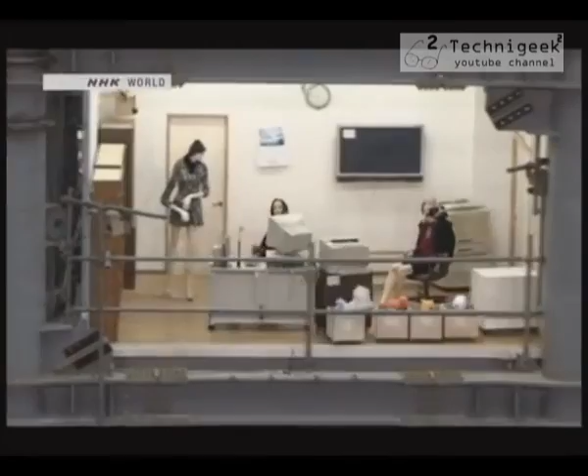But this wasn't out of pure luck. It was the result of decades of technological innovation. Engineers are now moving one step beyond ensuring the structural integrity of buildings during earthquakes. Their objective is to minimize the damage that can occur inside a swaying structure. With advances in technology, one day soon, the buildings themselves will no longer shake.

This technology already proved its worth. These giant dampers help protect a hospital close to the earthquake's epicenter. The shaking could still be felt, but inside the hospital there was little damage to medical equipment and procedures continued as usual.

The hospital remained functional and medical staff were able to focus on responding to the disaster. We were able to take in every single patient who arrived at the hospital. This was possible only because the hospital didn't suffer any damage. The building's resistance was a huge factor.

Japanese engineers are taking anti-seismic technology to new heights, making the buildings we work and live in stronger, more comfortable, and above all, safer.

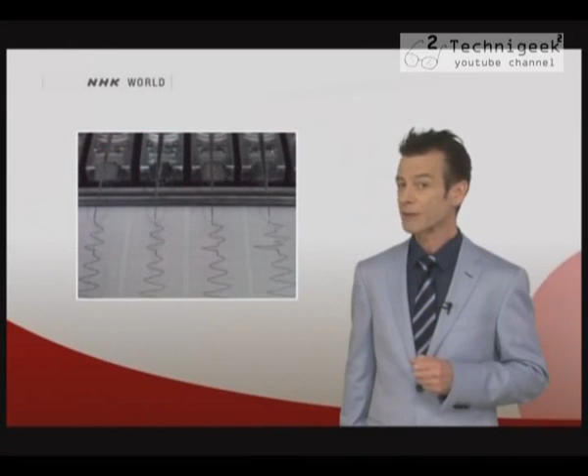Over the years, Japanese engineers have developed technology that can help a building resist the shaking caused by earthquakes. Seismic building codes are constantly being upgraded, and modern buildings are now safer than ever before. On this edition of JTech, we'll look at how technologies have changed over the last century and explore some of the most advanced anti-seismic applications developed by Kajima Corporation, one of Japan's largest construction companies.

I'm on the 51st floor of Roppongi Hills, a skyscraper in the middle of Tokyo's entertainment district. During the earthquake on March 11, 2011, most of the skyscrapers in Tokyo did sway, but we're told that this building didn't sway as much because of the anti-seismic technology that has been built into this structure. We're here to find out how that works.

The 53-story Roppongi Hills Mori Tower is one of Tokyo's tallest skyscrapers. To understand why it fared so well during the earthquake, we asked the company that designed it to show us one of the building's most important features.

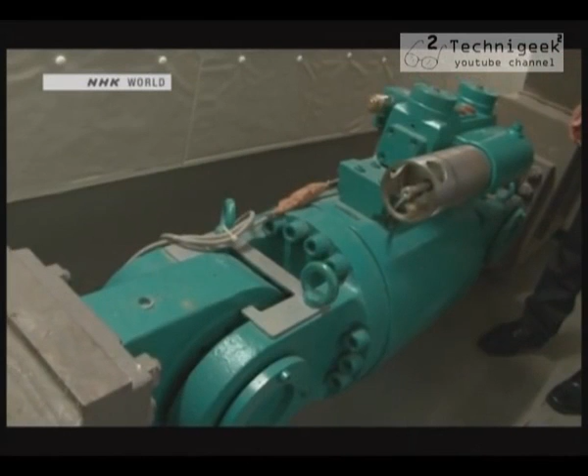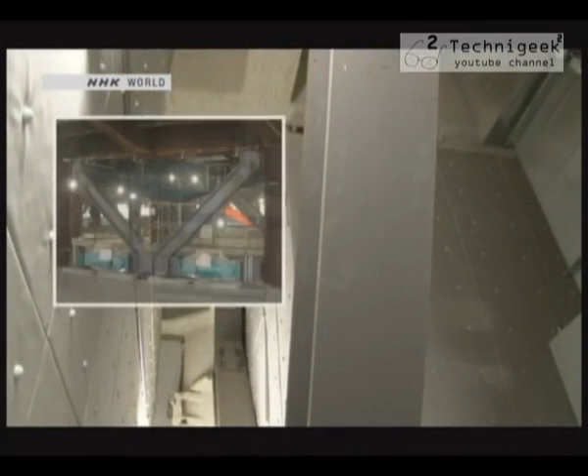This is the damper that absorbs the seismic shock waves. It looks really heavy. The damper is connected to the beams on the ceiling via a V-shaped steel frame. It's an integral part of the building structure.

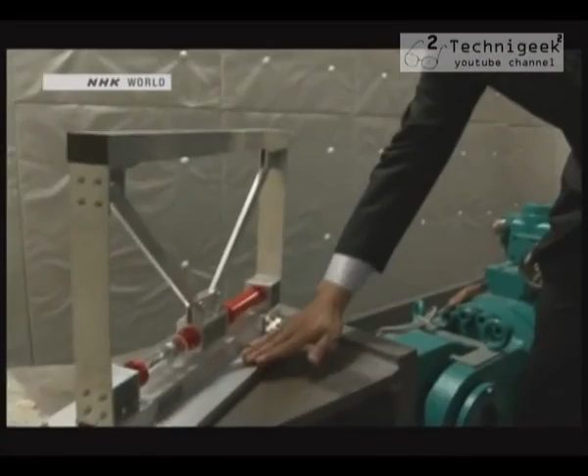In what way do they actually interact with the structure of the building? Let me show you on a scale model. The lower part here is the floor. When an earthquake strikes, the structure sways like this.

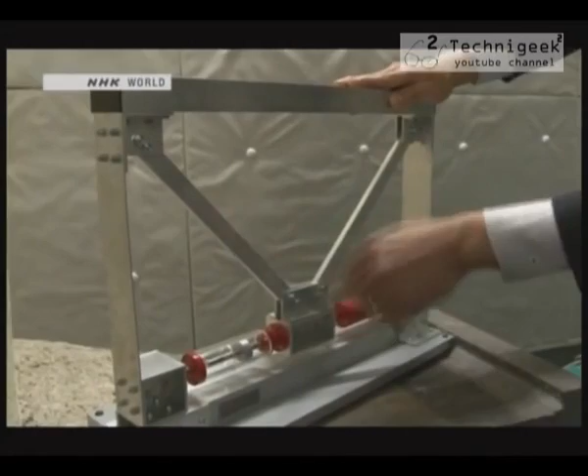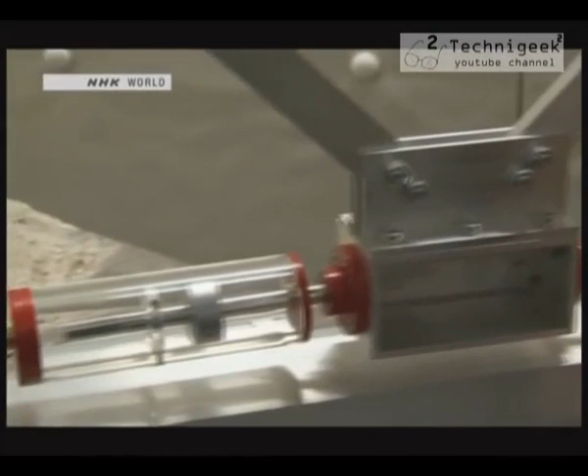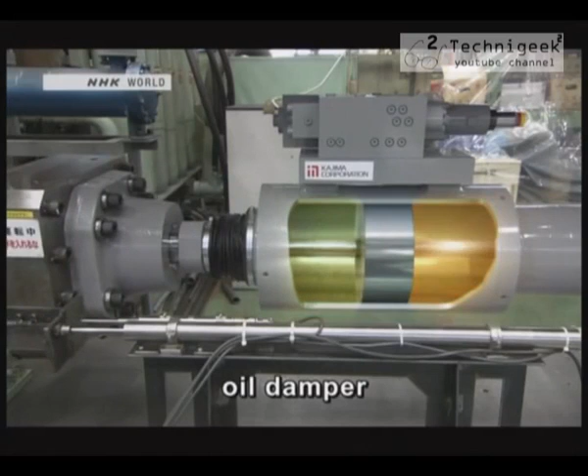The damper acts like a giant shock absorber, counteracting the building's rocking motion. The energy from the shock waves is transmitted through the V-shaped steel beams to a piston inside the damper. The damper's chamber is filled with oil. The piston compresses the oil, converting the kinetic energy of the swaying building into heat. This damper is capable of resisting 200 tons of pressure.

The Mori Tower is equipped with 356 of these oil dampers. They account for only a small fraction of the building's total weight.

So how well did this marvel of structural engineering absorb the shock waves of the March 2011 earthquake?

This restaurant is located on the 50th floor. When the earthquake struck, about 20 patrons were enjoying a late lunch here. Tables were set, and piles of plates and countless glasses were stacked on top of the counters.

Kaneda-san, you were actually working at this restaurant at the time of the Great East Japan earthquake. Can you explain to us what happened when the earthquake struck?

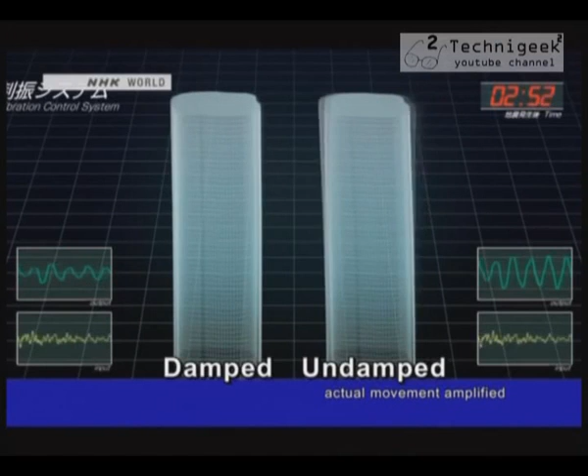What would have happened if the building had no dampers? This computer simulation offers some clues. The tower on the left shows the motion of the building as it was recorded during the earthquake. The one on the right simulates the same motion but without the dampers. The shock-absorbing structure was able to reduce the amplitude of the oscillation by as much as 50%.

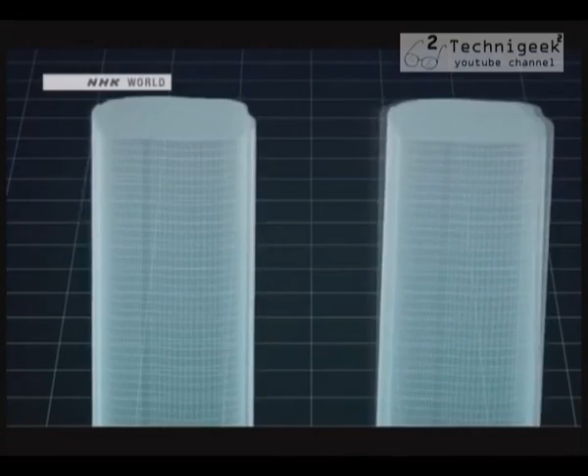This building, which would not have the oil damper system, is still swaying quite a bit at 3 minutes after the earthquake. And the actual building has almost stopped completely. Yes, the presence of oil dampers also allows the building to stabilize more quickly.

When it comes to earthquake protection, Japan's building codes are among the strictest in the world. It's little wonder when you consider that earthquakes are a daily threat. The country lies at the junction of 4 tectonic plates. More than 10 quakes are registered on average every day. 20% of all major quakes of magnitude 6 or higher that occur on the planet happen in Japan. Japan sits at the junction of 4 tectonic plates. Stress builds up along the subduction zones where a plate moves under another. When the stress is suddenly released, an earthquake occurs.

Earthquakes are so frequent, they have their place in popular culture and mythology. There's an ancient tale that describes how earthquakes are caused by a giant catfish whose back is the Japanese archipelago. Every time the catfish wriggles, the country shakes. And there's the saying, what we fear the most are earthquakes, fire, lightning, and old men. Why old men, I don't know, but the fact that earthquakes are at the top of the list is very telling of how scary they can be.

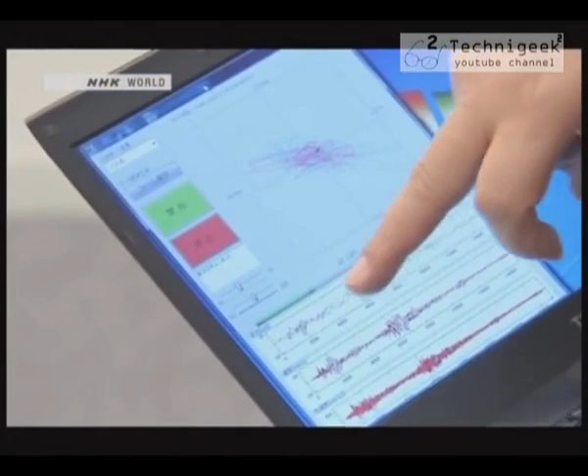This computer-controlled mobile platform replicates the swaying motion of a building during an earthquake. I'll be experiencing two types of quakes based on data from major temblors that hit Japan in the last 20 years. The first one is the magnitude 9 earthquake of March 2011, as it was felt in the city of Ishinomaki, about 150 kilometers from the epicenter.

The ground motion peaks a second time. Very unpredictable. Now it's getting a little more violent now. A little bit difficult to stay sitting on this chair.

Next, I'll be experiencing the shaking of the magnitude 6.9 earthquake that devastated Kobe in 1995. The city sat right on the epicenter. This feels a lot more violent than the previous earthquake. It's sort of quieted down now.

No two earthquakes are alike. The seismic waves generated by an earthquake depend on many variables, such as the amount of displacement, geological formations, location, and depth of the subduction. In the case of the March 2011 earthquake, luckily, not one skyscraper in Japan suffered severe damage. This proves that anti-seismic technology applied to modern high-rise buildings worked at protecting infrastructure.

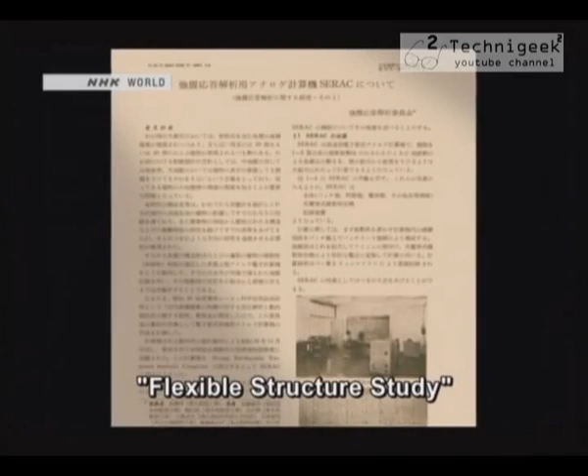It was believed that in order for a building to resist earthquakes, it had to be very sturdy. But sturdy structures were too heavy for high-rises. They'd collapse under their own weight. Engineers thought building quake-resistant skyscrapers was impossible.

The theory of flexible structures, as its name indicates, focuses on the flexibility, or elasticity, of the structure. It's about building a frame that doesn't remain rigid. This feature is essential to make buildings safe against earthquakes. So the basic idea is to counter the impact of shock waves by making the structure flexible.

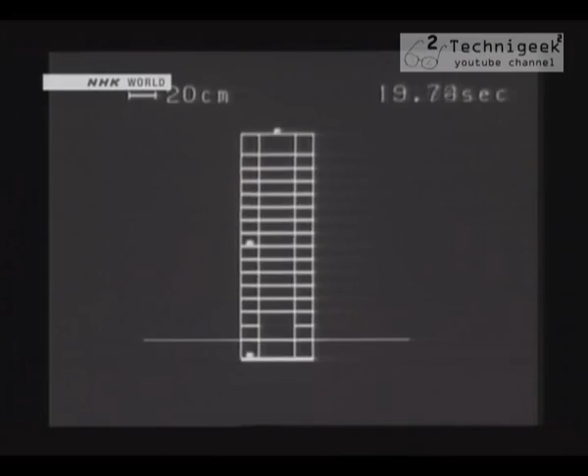Flexibility rather than sturdiness - this seemingly counterintuitive concept had its roots in ancient Japanese architecture. This 5-story pagoda not far from the university campus was a familiar sight for Professor Muto. Built in the late 17th century, it had never collapsed in an earthquake.

It was peculiar to me that a 5-story pagoda had withstood earthquakes for centuries. I had heard that it once had collapsed because of strong winds, not an earthquake. It was so odd. I thought there had to be some sort of secret hidden in its structure. I was fascinated.

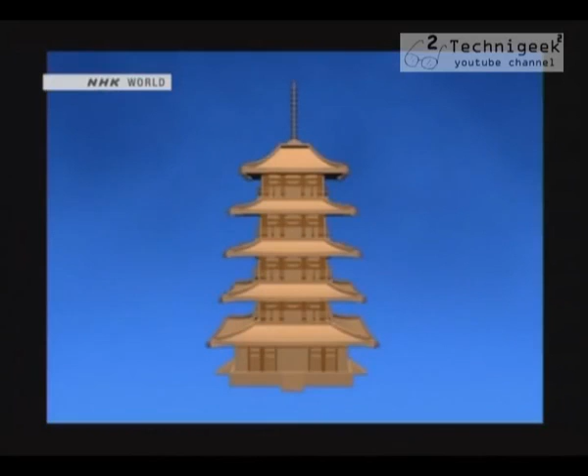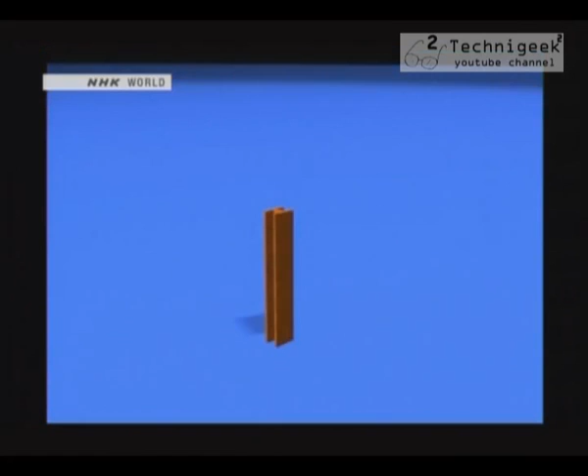Muto thought that the secret of the pagoda's resilience was in its ability to bend like a tree. Its timber-frame tongue-and-groove joinery meant the energy of a shock wave could dissipate in the friction caused by its moving wooden parts. Muto applied this idea to the design of the Kasumigaseki building. He needed a material that was at once strong and flexible.

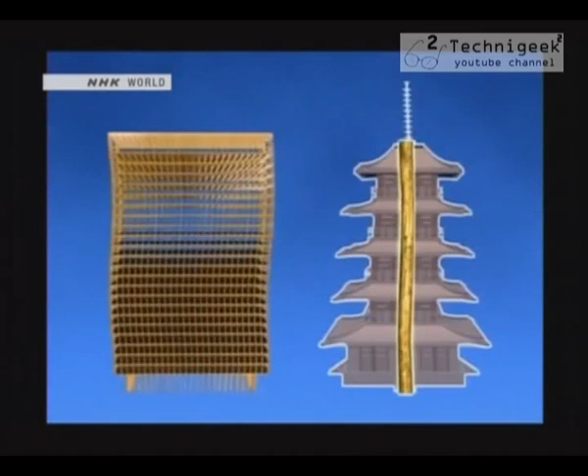A structure made with I-beams should respond to an earthquake like the wooden pagoda. Muto considered I-beams that were being used in other countries for building skyscrapers, but there were none that matched his requirements for flexibility. Kajima enlisted the help of a major steel manufacturer to develop a special type of I-beam.

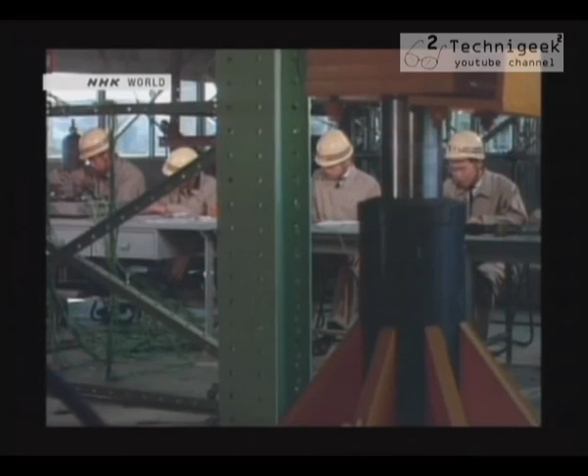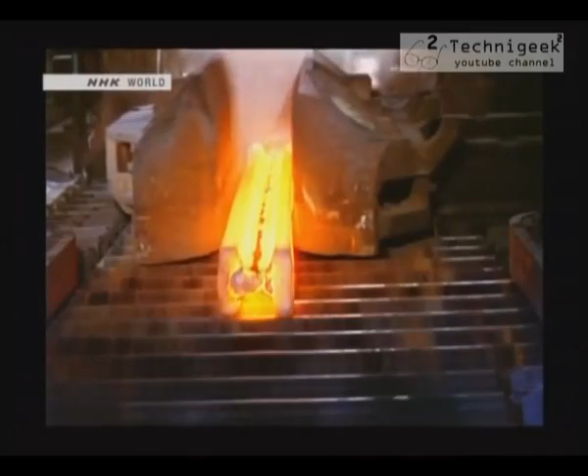The I-beam would have to be 60 millimeters thick to be strong enough to sustain the building's weight. In addition, it would have to be made of a different alloy to improve flexibility.

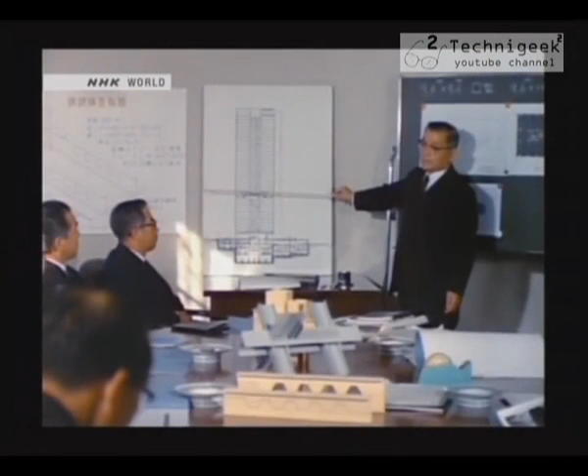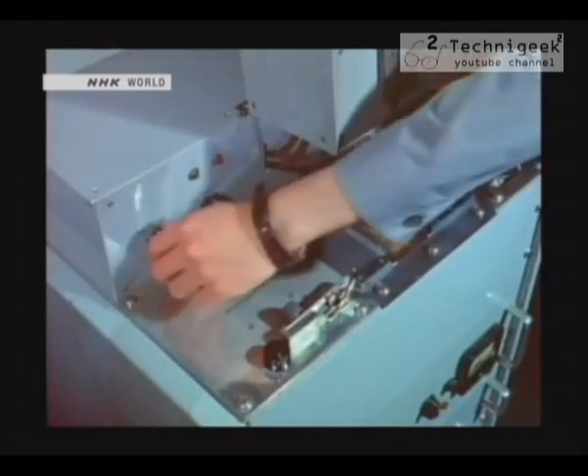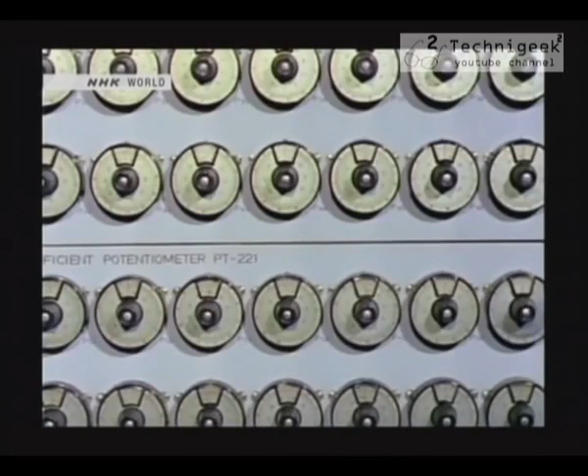Muto still had doubts about whether a flexible structure would be strong enough to support a skyscraper. So he conducted tests using the most advanced computers available at the time. Muto fed the machine all the data he could find about earthquakes from around the world. He ran the tests over and over again to see if the structure would resist the shock waves. He concluded the building could withstand an event 3 times stronger than the Great Kanto earthquake of 1923.

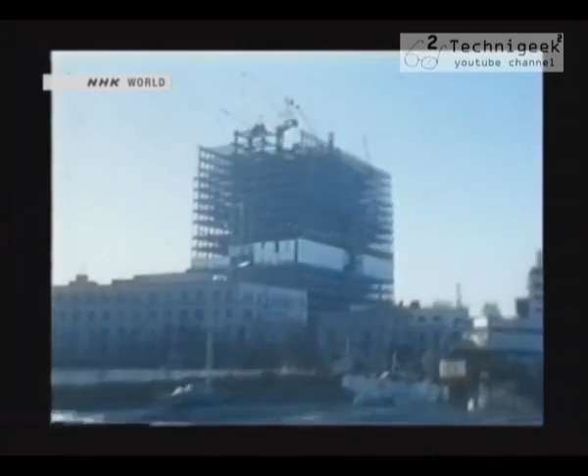Construction of the Kasumigaseki building began in 1965 with a team of Japan's elite workers. Workers had to bolt end-to-end 11-meter I-beam sections. Little by little, the building grew higher and higher.

In adjusting the I-beams, a deviation of just 1 millimeter would compromise the integrity of the structure. Every tie was checked as many as 30 times. The monumental project required a combination of skill, muscle, and brain power.

After 3 years of painstaking labor, the unprecedented project was brought to a successful completion. Japan's first skyscraper was the pride of Tokyoites. Flexible structures like the Kasumigaseki building set the standard for the construction of skyscrapers. Today, all high-rise buildings in Japan are built on the principles of strength and flexibility set forth by Muto.

The Kasumigaseki building proved that a building's flexibility greatly improved its quake resistance. That was just dandy for protecting infrastructure, but what about protecting the people and assets inside the building? A structure may be designed to hold up to the shaking, but it's a nightmare for the people inside who can be injured by moving and falling objects.

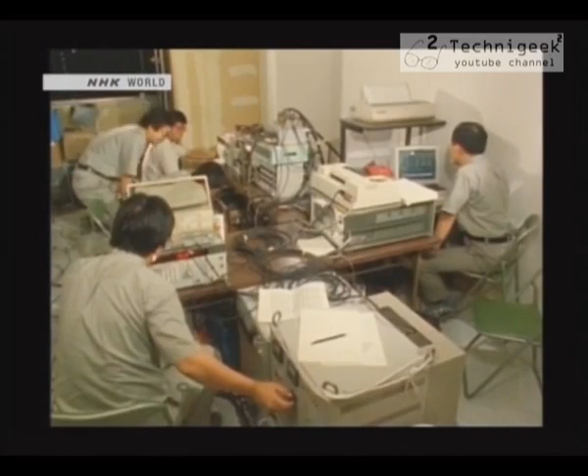In 1986, Kobori was invited to set up his own research lab within Kajima Corporation. It was staffed with the youngest and brightest of the company's engineers. Norihide Koshika was one of them. At first, he wasn't convinced that the notion of response control could be applied to buildings.

People around us felt we'd embarked on a rather strange kind of project. But after we started working on it, the idea gradually grew on us, and we started getting excited about it. Professor Kobori kept saying, whether now or in the future, earthquakes will remain unpredictable. He kept repeating that we needed to incorporate some kind of system into our buildings. I don't know how many times I heard him say that.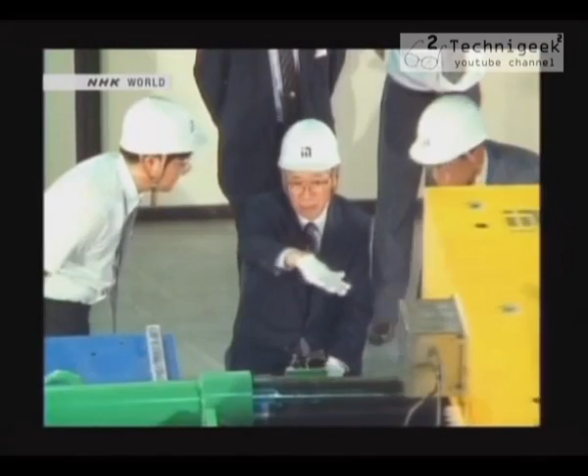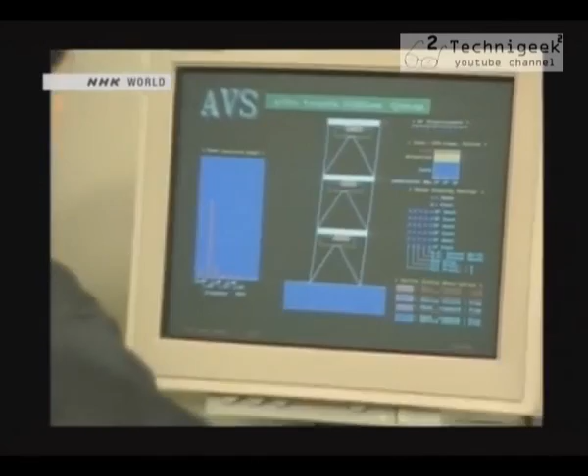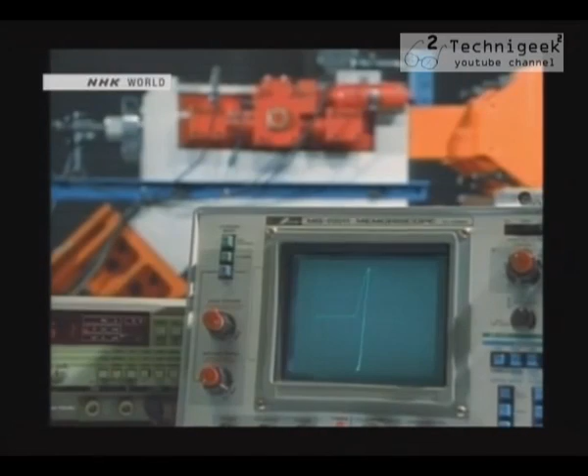To develop such a system, Kobori taught the young engineers a number of principles and methods on how to control seismic shock waves. Among those principles were altering the rigidity of the building's frame and using a device to absorb the oscillation of the structure. Kobori let his apprentices devise by themselves exactly how they were going to turn these ideas into practical applications.

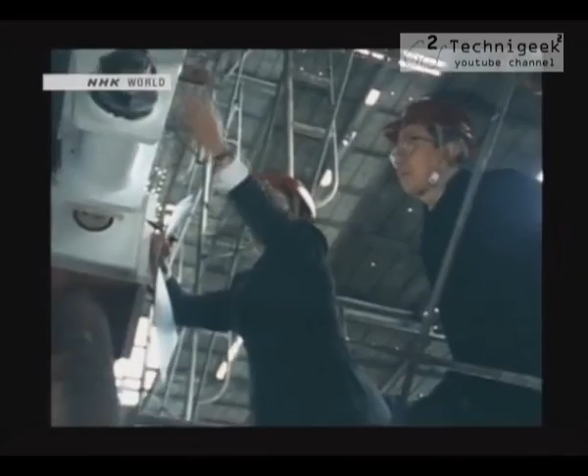It took them 3 years to come up with a solution. They called their system Active Mass Driver, or AMD, and Koshika was a key player in its development.

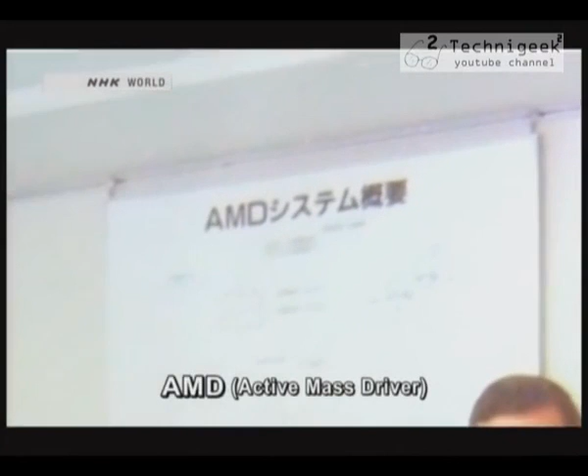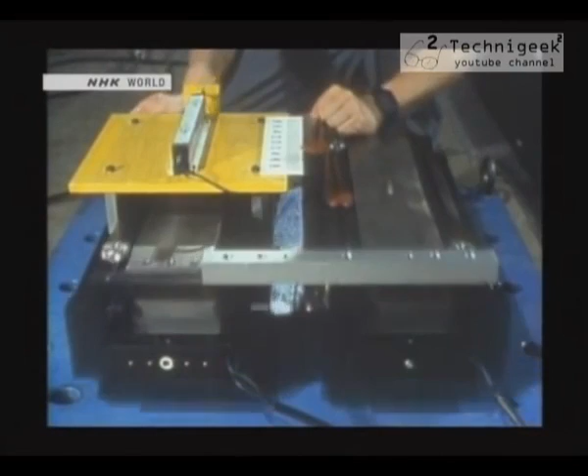AMD is a seismic control device with a computer-active control system. What kind of system is best to control, or how do we set the algorithm? First, we check the small model, and that leads to creating a larger model, and finally to the life-size prototype. Then we put the prototype on a shaking table to do more testing. If it goes well the first time, it means that the design is beginning to show signs of success. That is our process. This is the device.

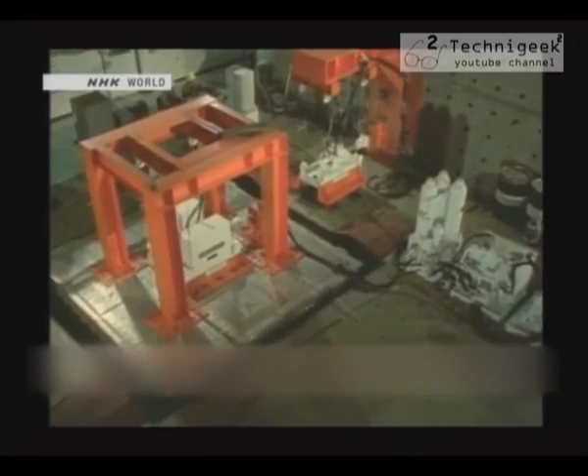When the shock waves from an earthquake move through the building, the device counteracts the shaking. It was a revolutionary system. This is the main part of the device. It weighs 4 tons.

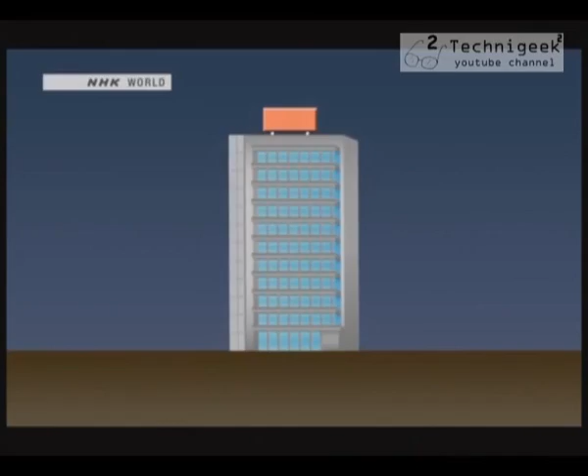It moves in a direction opposite to the movement of the building and cancels out the shaking. The building and the ground around it are fitted with sensors that relay data to this computer. In a split second, the computer analyzes the data and controls the weight to move in a certain way. The system starts reacting before people inside the building are even aware of an earthquake.

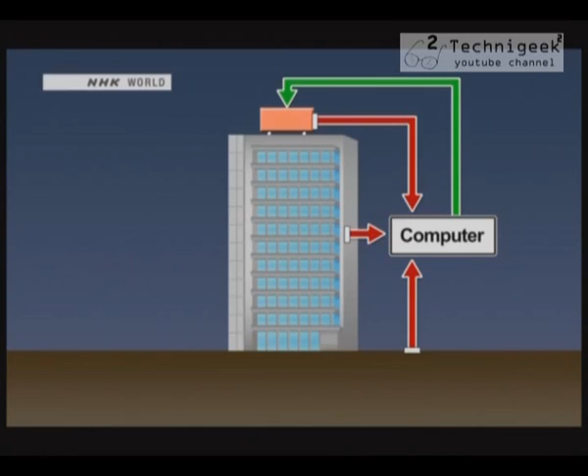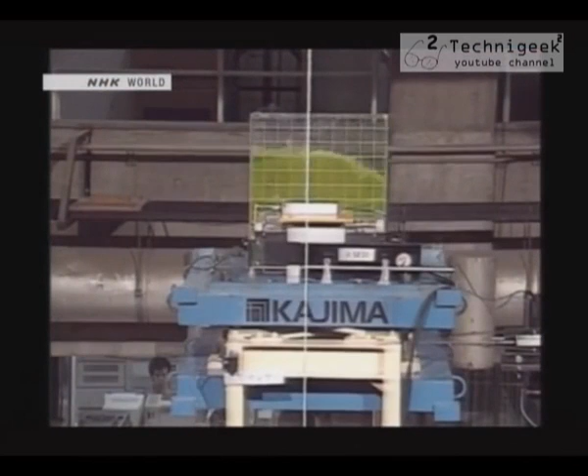This simulation demonstrates the effectiveness of the AMD system. The water in this tank clearly shows that the building is shaking. When the AMD system is switched on, the liquid stabilizes.

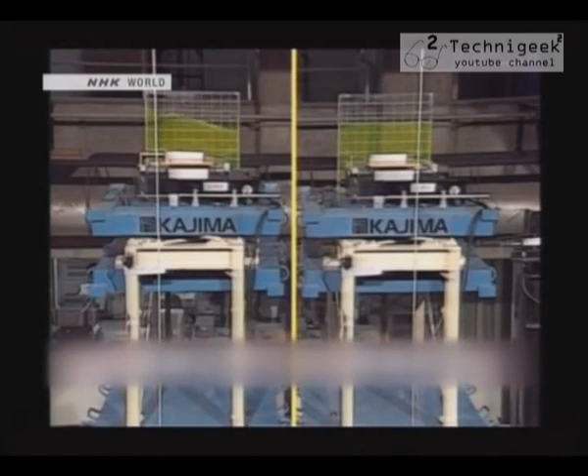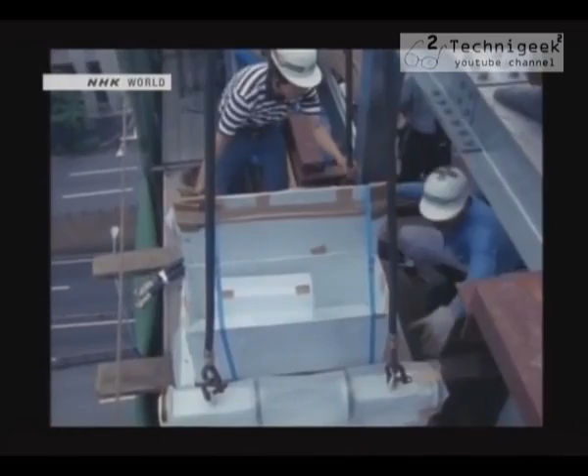This is the first example of a building fitted with the AMD system. The tall, thin structure makes it extremely vulnerable to swaying. A pair of AMD devices using different weights has made it capable of withstanding even complex twisting and swaying patterns called torsion. Kajima's engineers conducted tests inside the building using machinery that replicate the vibrations of an earthquake.

The AMD is activated. The turbulent water in the tank has gone almost still. The reverse swinging action of the AMD is controlling the building's shaking. The world's first seismic control building was born. Since then, engineers have been gathering data on the effectiveness of the system and how earthquakes affect the structure.

Professor Kobori strongly believed in the importance of applying the results of his research, but more important still was to test their actual effectiveness. This first building was completed in 1989. That's more than 20 years ago already, but the system fared perfectly well during the earthquake of March 2011.

Engineers at Kajima had succeeded in developing technology that could help protect buildings and people inside them from severe damage caused by large earthquakes. The damping systems used in the Roppongi Hills Mori Tower, completed in 2003, proved their efficiency in the March 2011 earthquake. But what about older buildings? Kajima engineers took the technology to a higher level, up to the rooftops.

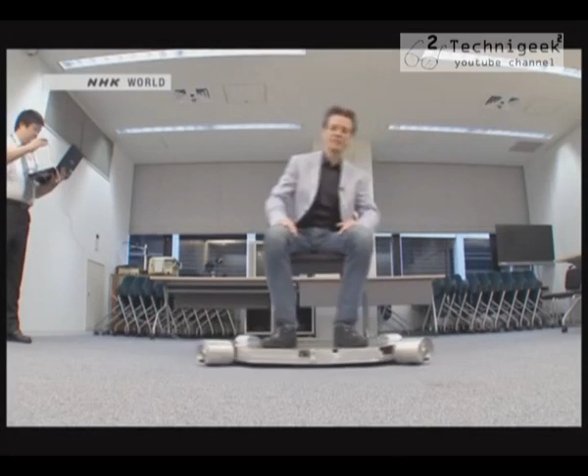Oh, this is quite surprising. I can sense how the building could be swaying quite a bit, especially the top part of the building.

The building rocked about a meter from its center and continued to sway for 10 frightening minutes. This long-lasting action was a result of seismic waves called long-period ground motion. This type of wave had rarely been observed before.

The motion is so erratic and so unpredictable that I can imagine how discomforting it must be, especially for people who are sensitive to motion. So people who suffer from motion sickness, either car sickness or seasickness, this kind of shaking must be quite discomforting for them.

The Shinjuku Mitsui building was designed by Kiyoshi Muto and constructed in 1974 by Kajima Corporation. This office tower also swayed madly on the day of the earthquake. It suffered no significant damage, but management received complaints from the tenants. They were concerned about safety.

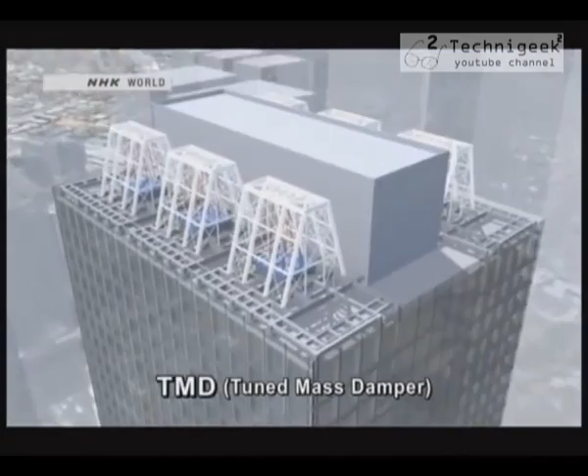Kurino's system is called Tuned Mass Damper, or TMD. Like the AMD system developed in the late 1980s, this one uses counterweights like giant pendulums to reduce the swaying of a building. Oil dampers are used to control the motion of the pendulum and help absorb more efficiently the kinetic energy of the swaying building. The result is a structure that stabilizes more quickly after a major earthquake.

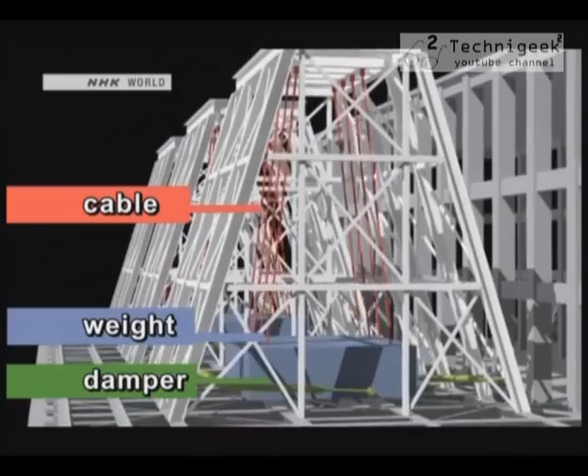The rooftop installation wouldn't bother tenant companies, so permission to go ahead with the project was granted. One of these giant pendulums is nearing completion at Kajima Corporation, so we headed out to take a closer look.

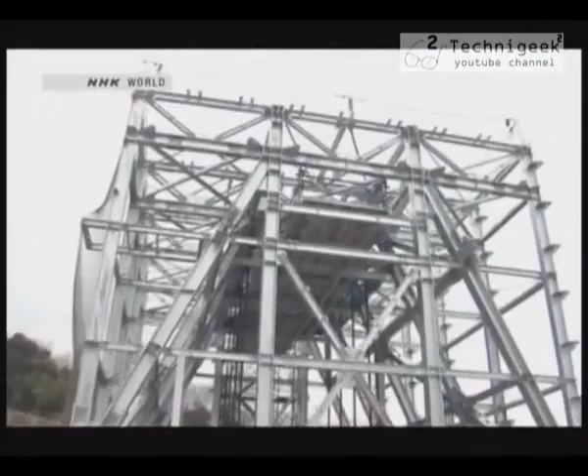Mr. Kurino, hello. Hello. Nice to meet you.

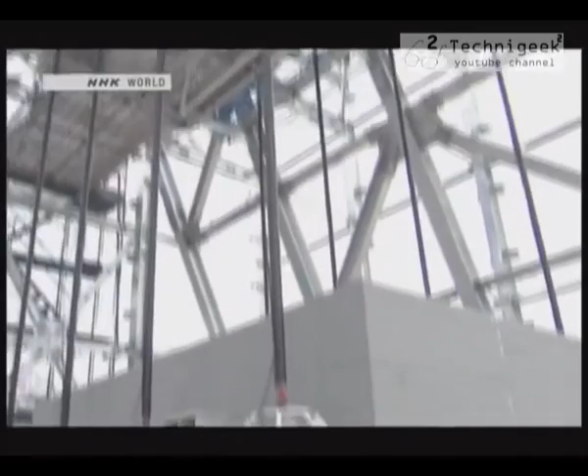The pendulum weighs 300 tons and is held up by 8 steel cables. The mass is made up of smaller, more manageable slabs of concrete that can be lifted by crane to the rooftop.

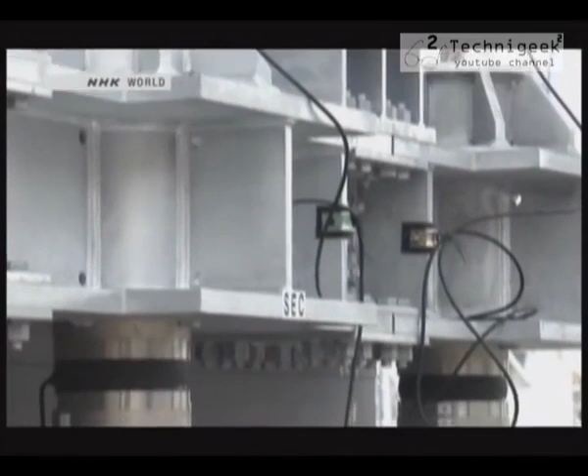This large TMD system is the first in the world designed to respond to megaquakes. It's never been tried before, because of the sheer weight of these 300-ton blocks. In a major earthquake, they swing over 2 meters. This system is the first capable of safely controlling the motion of such enormous weights.

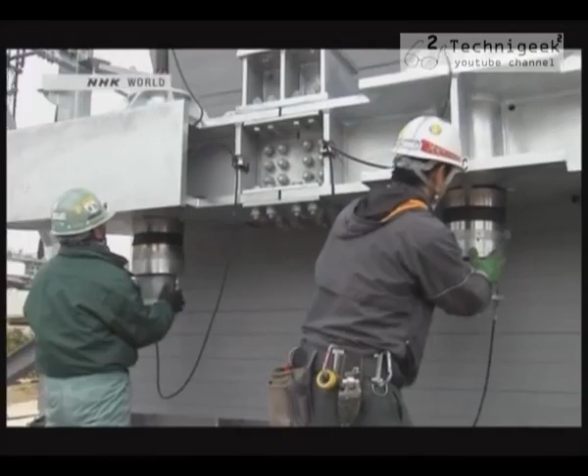Engineers are anxious. Today, they're going to test the suspension system. This massive weight will be lifted off its support base for the very first time. The weight has to be perfectly distributed between the cables, or the system will malfunction. Workers fine-tune the weight distribution by adding or removing steel plates that form the base.

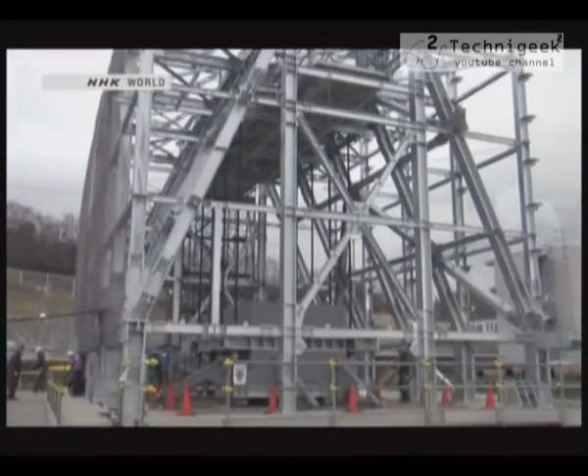Once in place, this TMD system will effectively halve the amplitude of the building's oscillation and reduce its swaying time by 83% in an event similar to the earthquake of March 2011. If the tests are conclusive, the 40-year-old Shinjuku Mitsui building will be fitted with these giant pendulums by next spring.

The technologies we apply are based on different types of earthquakes and a building's profile. Devising the right strategy to prevent swaying or collapse is both the most difficult and the most interesting part of the job.

Anti-seismic technology has come a long way since the 1960s, but much has yet to be understood about large earthquakes.

Big earthquakes are not that easy to understand. They're driven by very complex factors. So we're really not yet at the stage where technology makes people completely safe and secure. We need to continue research and development in this field.

All this anti-seismic technology for protecting high-rise buildings is truly a blessing. But what about low-rise buildings? Researchers came up with a concept called base isolation.

The base isolation system separates the building from the ground. It's a mechanism that reduces the vibrations delivered from the ground to the structure by placing a device between the two.

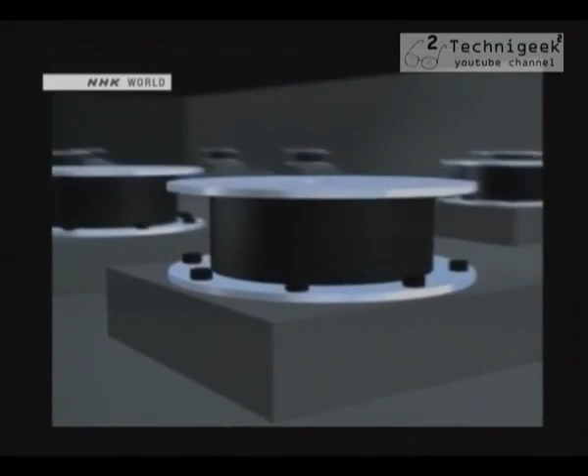The type commonly used consists of laminated rubber with alternating layers of rubber and steel plates. This is not only strong enough to bear a weight of hundreds of tons, it is also elastic.

Thanks to this base isolation device, many lives were saved at one hospital hit by the earthquake on March 11, 2011.

The Red Cross Hospital in Ishinomaki is located relatively close to the epicenter. It's a core facility providing advanced medical treatment to an area with a population of 220,000.

This footage shows the situation inside the hospital at the very moment the earthquake struck. The building is shaking, but machines like printers and PCs are not falling from desks, and cabinets are not toppling.

Dr. Tadashi Ishii, the man in charge of disaster preparedness, was carrying out surgery when the earthquake hit. Things were rattling, but we held on to them and nothing fell down. Our emergency power system started in about 2 seconds, including the electrosurgical instruments and the anesthesia apparatus, was reinstated.

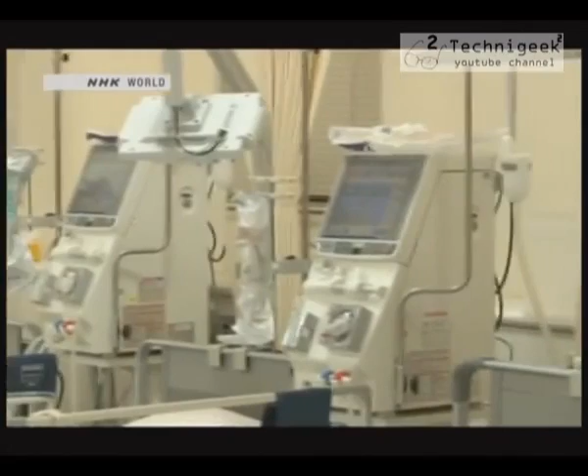At the dialysis center, many patients were being treated on the day of the quake. Here, too, all systems remained operational. There was almost no damage to the hospital's infrastructure or to the equipment inside.

Seismic isolation devices were installed in the hospital in 2006. Authorities had correctly predicted that a major earthquake would one day strike the region. The decision to install the dampers was made at the time the hospital was moved from its original location.

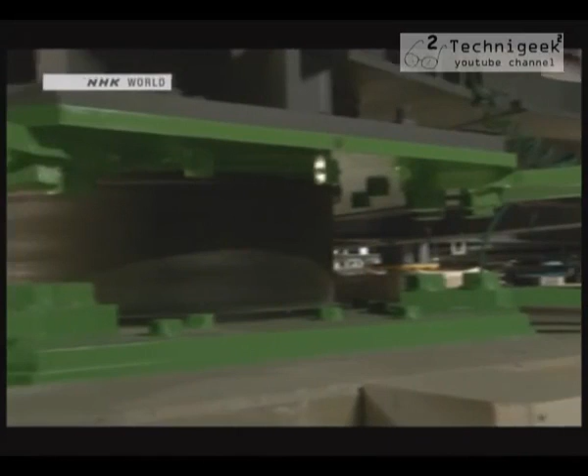The hospital is fitted with 126 dampers. A single device can support more than 800 tons. There is a swing trajectory, and there is also movement of the building. It has moved a maximum of 26 centimeters from the center. The device has absorbed that much amplitude.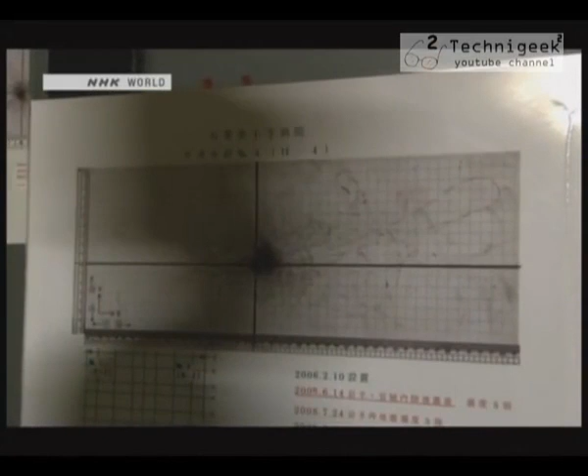There were severe cracks in the ground around the hospital. Then we found out that the shaking inside the hospital was totally different from the outside surroundings.

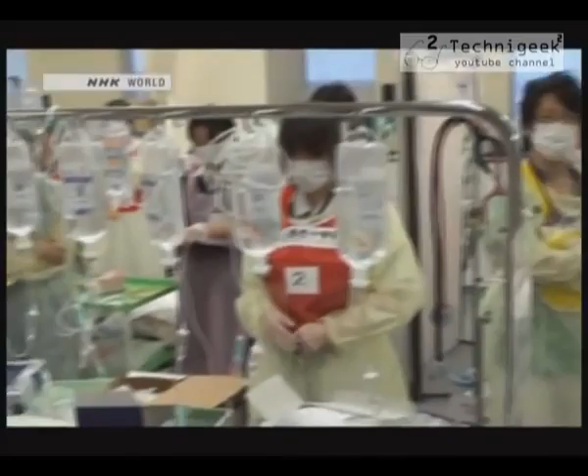The disaster coordination team was established just 4 minutes after the earthquake occurred. Then the staff shifted their attention from what was going on inside the hospital to what was happening outside. Staff had created a disaster prevention manual and held thorough drills on a regular basis. Since they were unaffected by the earthquake, they could rapidly get on with preparations as described in the manual.

We often receive praise for preparing a good manual and carrying out drills based on it. But that's not sufficient preparation for disasters. The crucial thing is whether or not the hardware was okay.

Because all our hospital functions were in order, we were ready to respond to any type of injury or sick person. That's why nobody among the hospital staff panicked. The building's resistance was a huge factor.

40 minutes after the earthquake, a gigantic tsunami engulfed Ishinomaki. All 86 medical institutions in the area were knocked out of service. The Ishinomaki Red Cross Hospital was the only one that remained 100% functional. The injured began to arrive in droves. The hospital was soon packed with patients.

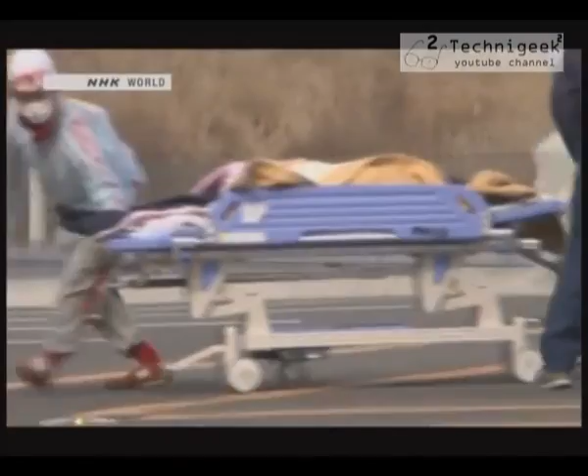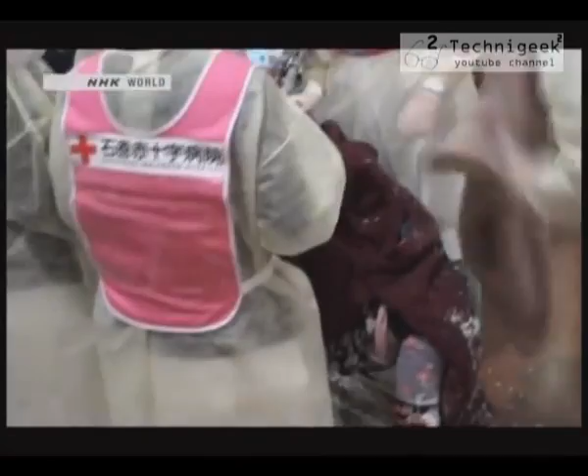The extent of the injuries was far beyond anything the medical staff had expected. They attended to their patients around the clock.

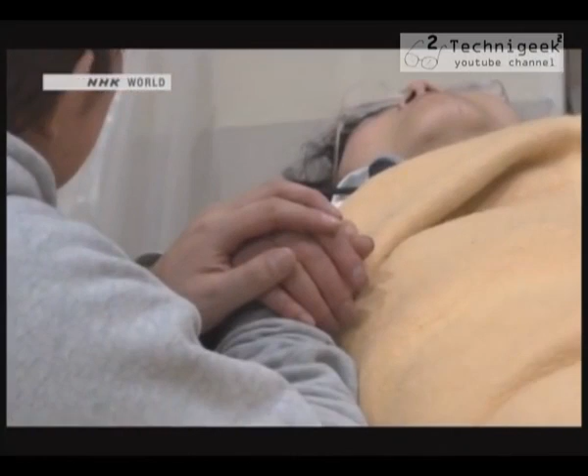We also could be the victims. Under such circumstances, how could we manage to do all these things? Basically, unless we realize proper anti-seismic construction methods, we cannot prevent injuries and deaths.

The hospital's anti-seismic upgrades were decisive. Now, construction of a new medical ward pre-fitted with base isolation dampers will ensure the safety of staff and patients in future earthquakes.

Seismic structural control technology can be applied not only to new buildings, but also to existing structures, and the same is true of base isolation technology.

Tokyo Station is the capital's main rail hub. The building is registered as an important national cultural property, but the aging structure required large-scale restoration work to make it earthquake-proof. Engineers considered different approaches, including rebuilding from scratch. In the end, they chose to retrofit it using base isolation.

When an earthquake occurs, it's like this. This is the base isolation device, which is designed to absorb the vibrations. If the building moves, this part here expands and contracts. This is where the movement is adjusted. That's how it works.

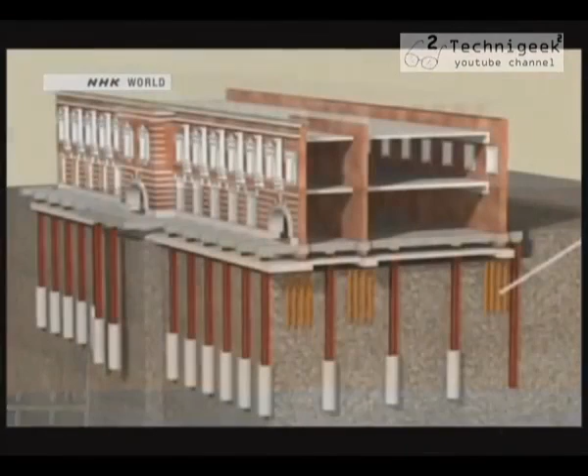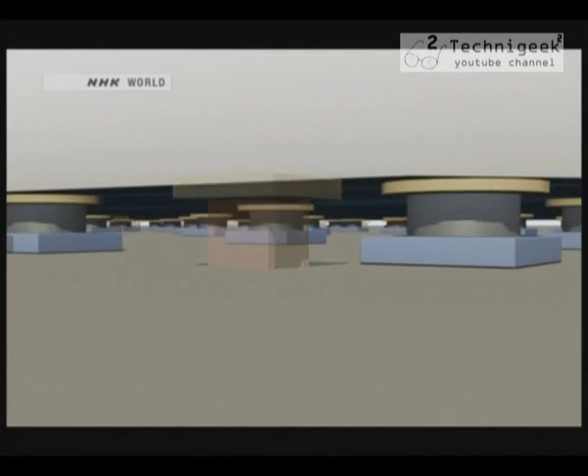Tokyo Station had been built on a foundation of 10,000 pine pylons. In the recent upgrade, the pylons were removed and replaced with 352 base isolation devices. The building weighs about 70,000 tons and is 335 meters long. To replace its entire foundation was a truly bold plan.

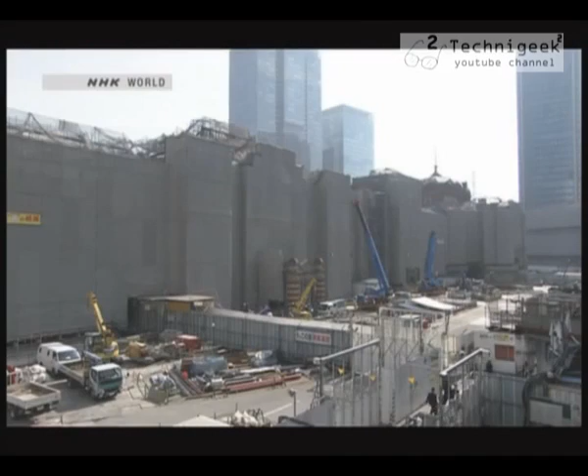The job was awarded to Kajima Corporation. It took more than 5.5 years to complete the work.

I was aware that with such a difficult project, my responsibility was enormous. Tokyo Station is a truly historic building, and it is an important cultural property of Japan. After all, it was important that businesses stayed open during the reconstruction work.

We had some drawings to help us, but anyway, we first had to dismantle many parts to investigate the site. Most of the work had to be done in a dim light. We were basically fumbling our way around.

Approximately 500,000 people pass through Tokyo Station every day. The station had to continue functioning, so the heavy construction work took place mainly at night.

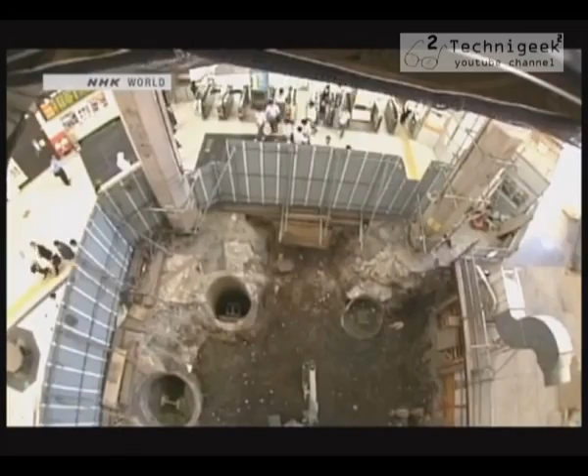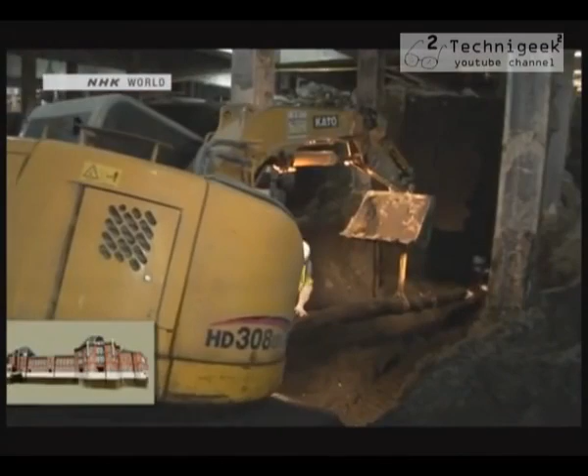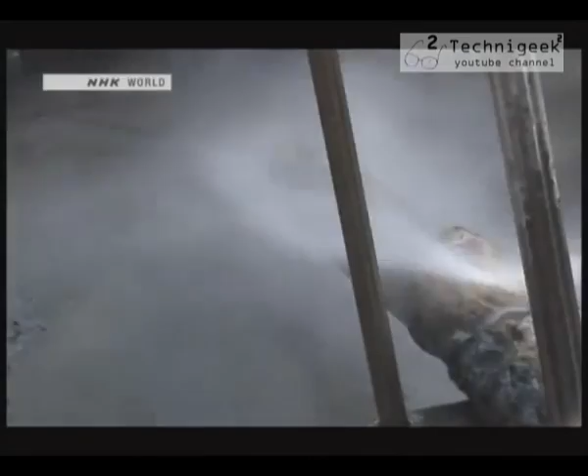Workers dug out the pine piles one by one. Amazingly, after being buried in the earth for 100 years, they were still in perfect condition.

They smelled just like living pine trees. They were beautiful. We were so impressed by their condition.

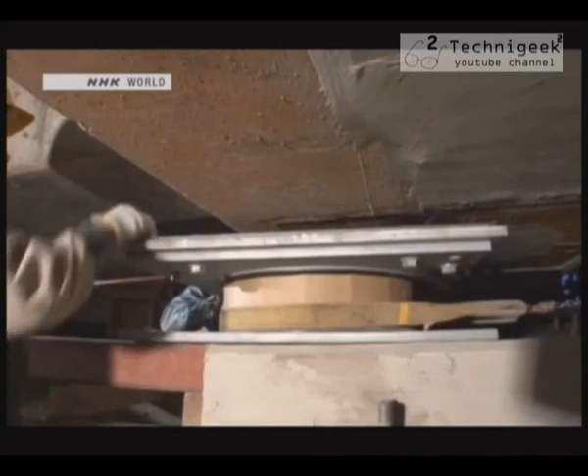Once the pine piles had been removed, the base isolation devices were installed in the gaps between the ground and the building where temporary support columns had been placed. Restoration work on the outer red brick walls and interior features were carried out and completed at the same time.

The success of the restoration of Tokyo Station proved that in Japan, regardless of the age or size of a building, it is possible to make it quake-proof.

Earthquakes will always be a threat to people and infrastructure anywhere in the world. But evolution and innovation in anti-seismic technology is making buildings more resistant. So, the next time an earthquake strikes and you happen to be inside a modern skyscraper, rest assured that you are safer right where you are.